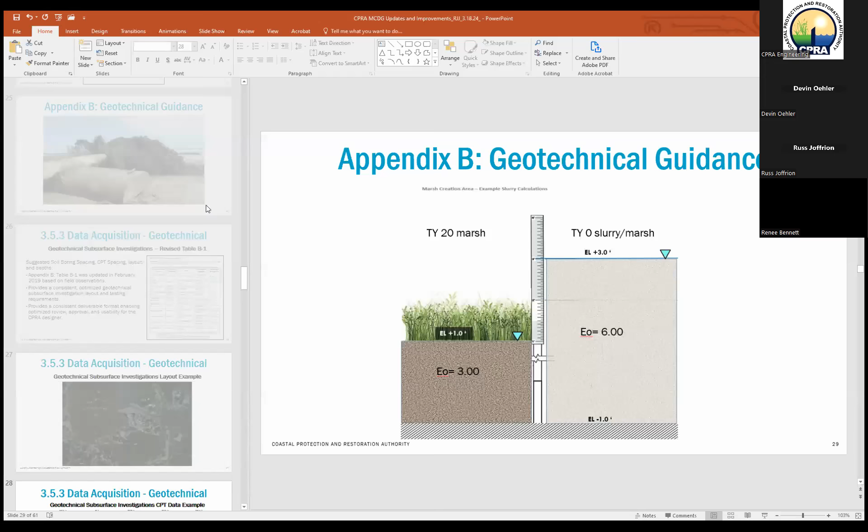All right, can you guys see that? It's in the presenter view screen. Is that good? I think it'll work. Then there is a way to show the presentation view too. Let's see, little icon down on the bottom right, if I'm not mistaken. I don't see anything. All it's got is stop sharing, hide, nothing. Presenter view, is that it?

Shoot, I'm seeing your content here. Okay, so I'll get started.

Introduce myself real quick, my name's Russ Joffrion. I'm one of the managers at CPRA Engineering Division. Some of you guys know me, some don't. Been around for a while. Actually have over 30 years with state civil service. I did about 10 years doing bridge construction and foundation design, and then came here in the early 2000s and have been having lots of fun learning marsh creation.

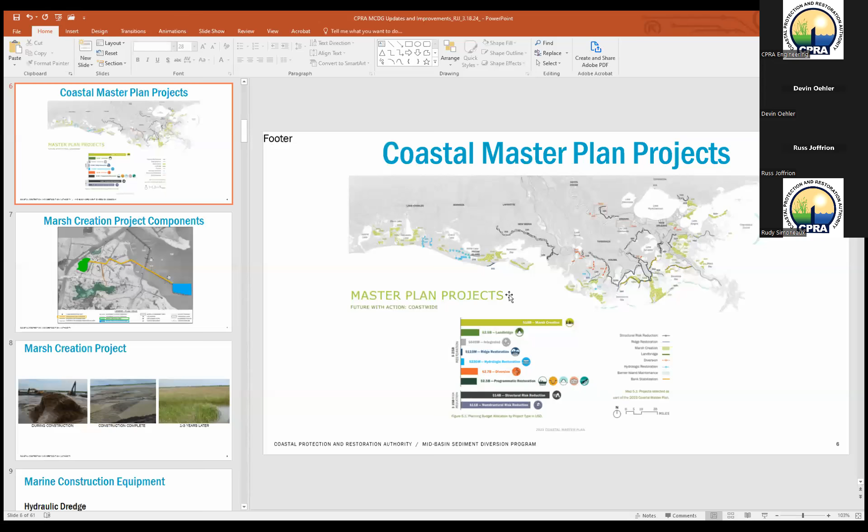Hold on, y'all bear with me for one second. Jack, can you see this? I'm seeing just my own view since you've stopped sharing. Hold on, one second, let's try this one more time. I was having computer issues yesterday. Okay, what do you see, Jacques, right there? I see your presenter view, okay, which I guess will work, but it would be nice to get it in full presentation view. Okay, so I'm gonna hit slideshow, do you see that? Yeah, like somebody else was saying too, F5 is the keyboard command for that. I see the same thing right now though. Do you see the slideshow? I see what I'll call the presenter view, not the full slideshow.

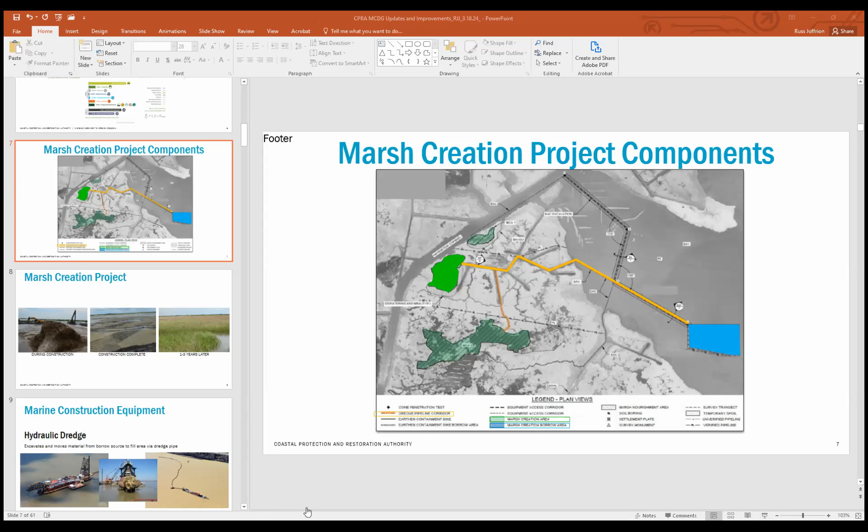I don't know what it's doing. Switching - that's your computer screen, not the PowerPoint. Go back to the Zoom. Same place you were on the share. Or do a new share and just do entire screen.

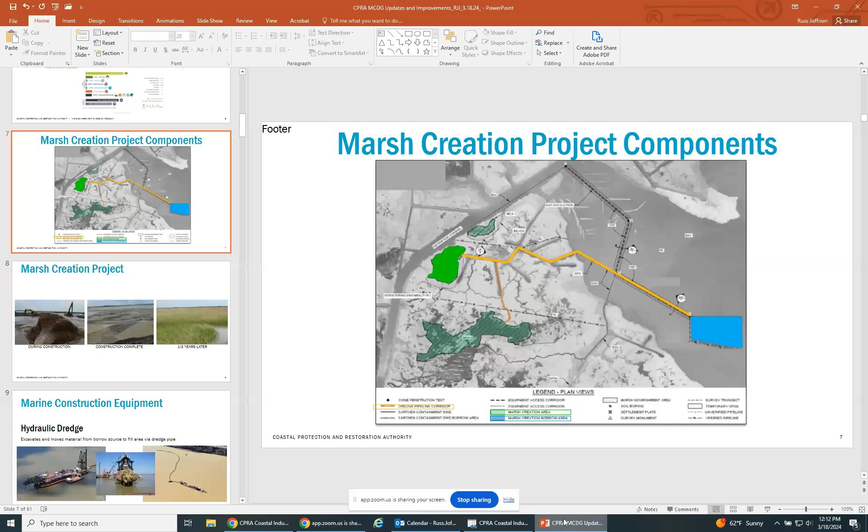Okay, hold on, all right, share that. Now go to PowerPoint and start the show. Okay, now can you see that? Yes, that's good, Russ, we got it. Good, okay, if I move it, do y'all see that? Good to go, thanks. All right, thanks, appreciate it. I had technical people helping me out.

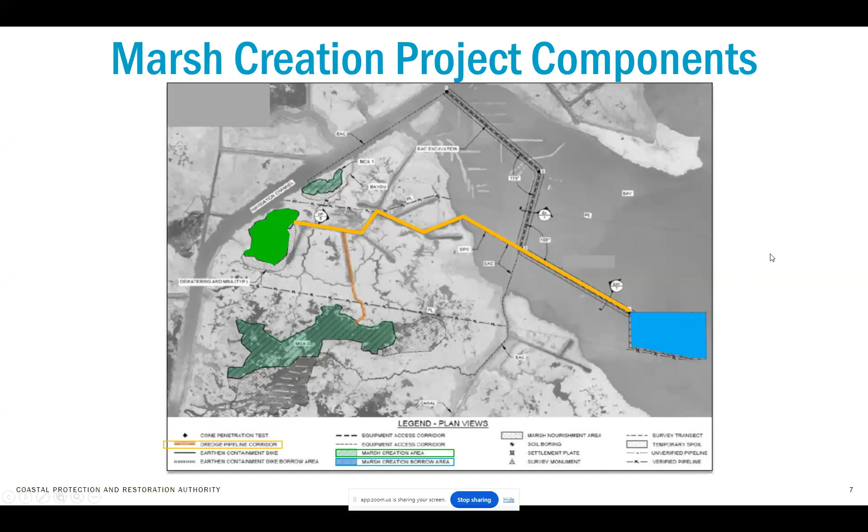Thank you, Travis. So the marsh creation components - I talked about that previously, that you've got your three major components. Nothing flashy here. So the marsh creation project, this is just a few slides showing generally how this stuff goes down. It's primarily constructed via hydraulic dredging sediment, pretty long distance.

That material is spread out within a marsh creation area. And then years later, typically 1 to 3 years, we get a platform that has jump started to help the marsh platform and the ecological side of that system start to take root and take over. So that's typically what it looks like.

I wanted to run through some of the equipment, because all these things are related to help implement these types of projects, and they're all marine-based equipment. So this is a view of a hydraulic dredge. This is Mississippi River dredging sand. It's a 30-inch dredge, capable of dredging pretty deep - 70, 80, 90 feet.

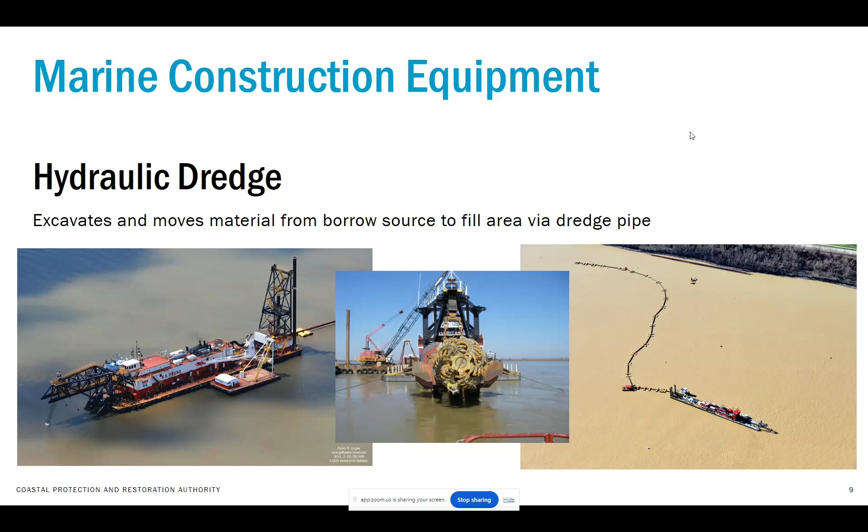Dredge pipeline could be made of different components. Some of the parts are floating rubber hoses. Primarily steel is what's used on the Mississippi River projects due to the sand. These will come in segments that are pre-welded and then flanged together. So logistically, these larger projects are pretty challenging, especially on the river, because you have navigational safety requirements that you also need to abide by.

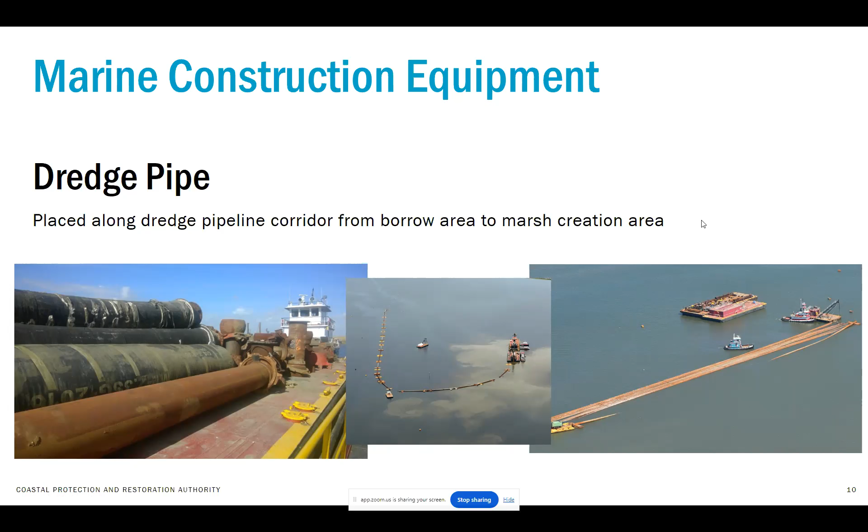But the components are the same, whether it's a river project or an inland project. You have the hydraulic dredge, you've got the dredge pipe, and then you have to build the containment to hold this sediment. This is typically accomplished by a tracked marsh buggy or a shallow draft barge mounted clamshell of some sort. What's interesting is over time, the contractors have helped develop some equipment that's more readily available to go into some of these shallow water areas, typically where containment needs to be built without a tremendous amount of drafting requirements. So that actually is a plus.

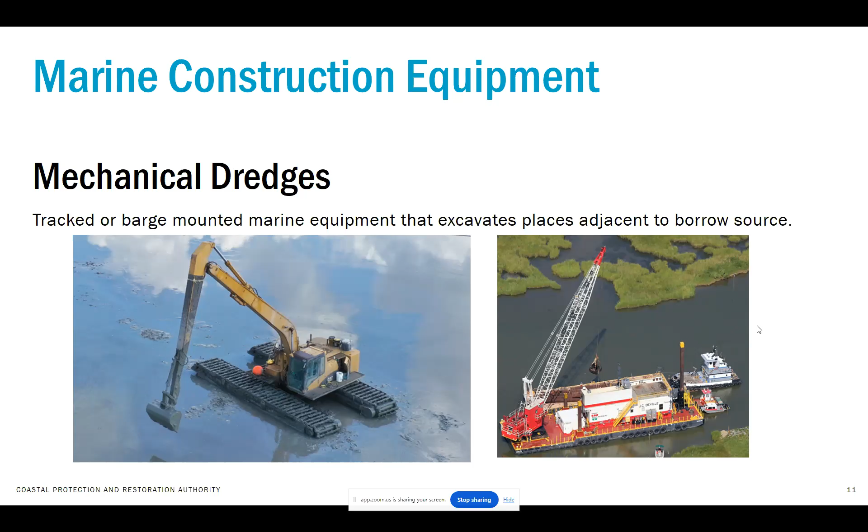You end up with a better containment dike design template if you can take bigger chunks at a time. So I'm going to keep moving.

Design guidance improvements - I thought it was important to show this slide because it gives you just a snapshot of the general components of what's going on. I think Syed will be talking in the future here on subsidence, and what's going into that, the effort that CPRA has done to try to develop those parameters. And what we tend to focus on the engineering side is the volume and the elevation and the hydrology, because these things affect the initial impact of the performance of that marsh platform.

So just to get everybody pointed in the right direction, what we're trying to do on the technical side is to jumpstart that system, so then the plant processes and the different hydrology systems and the sedimentation process can take over. So I'll move forward.

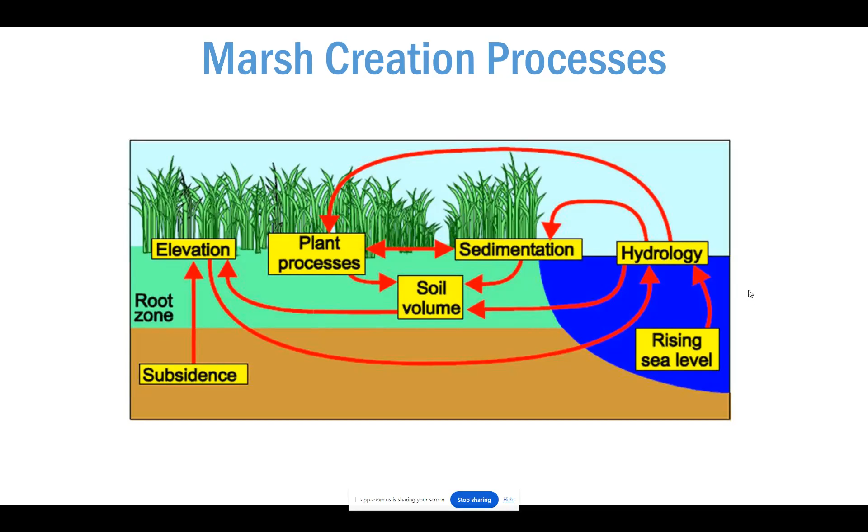So for the sake of time today, I'm going to focus on three areas: the survey and geotechnical data acquisition, your marsh creation area design, and construction. These three things, I would say, impact the performance of this type of project more than the others. So we'll focus on these.

So what are some of the improvements? Putting this PowerPoint together, I had to think back through our perspective of what we were trying to do. And I would consider what we've done so far a pretty good success as a jumpstart of a guidance document. If it's not broke, don't fix it. But there are always some things you can improve on, and that should be in the back of everyone's mind.

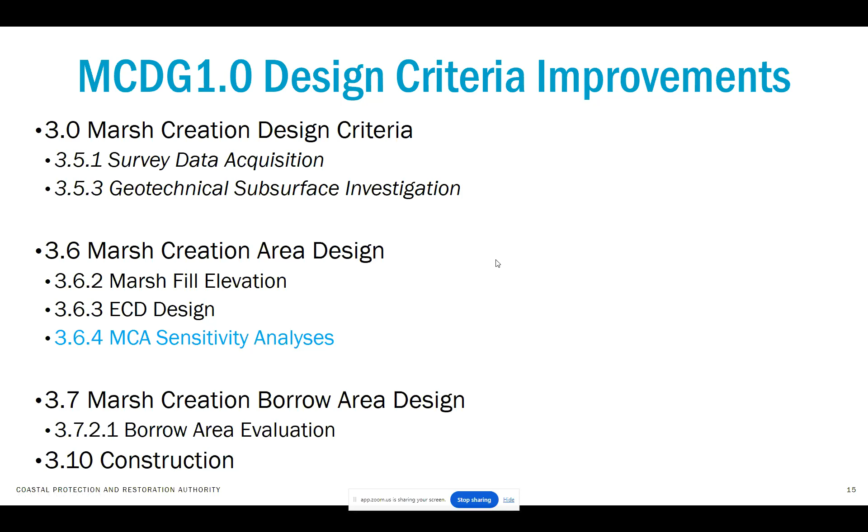So I'll focus on these components only. And the one in blue, where we're talking about MCA - Marsh Creation Area Sensitivity Analysis - something new that we're probably going to add. So we'll get into data acquisition. We'll go through Marsh Creation Area Design, and then a little bit on borrow area evaluation and construction.

The big highlight we've learned is trying to identify existing oil and gas infrastructure within the landscape. One of my colleagues presented on this last year, and the year before, and the challenges associated with that cannot be reiterated enough. We find ourselves building these projects in more challenging areas, and within our working coast there's existing pipelines, flow lines, active and abandoned wellheads. All these things we need to work around. So how do we do that?

These are the main cast of characters responsible for these things: the pipeline owner, the contractor, CPRA, the engineer of record, and the PLS. Each of these people and organizations has skin in the game when it comes to identifying existing infrastructure.

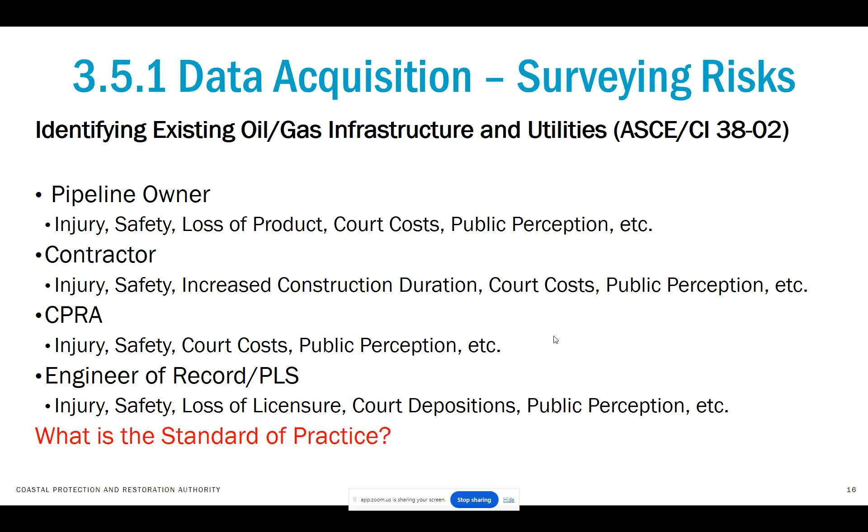So what is the standard of practice? Way back when we were putting these guidelines together, subsurface utility engineering was just coming out. It's a whole different subset of technical engineering that needs to happen on projects. It's gotten so bad on public works projects that this is now included as part of the engineering and design, especially DOT projects. So ASCE got together and said, here's some general guidance on how you delineate, interpret, and identify existing subsurface information.

We used this as a jump start to see if it would work on our projects, and it's been pretty successful. Since 2017 we've continued to use it during the design phase. It promotes safety during construction operations, and more importantly, it provides a consistent standard of practice for the PLS trying to identify and locate this information within our landscape. It also provides a consistent deliverable format for anyone involved with trying to interpret this information, and I'm going to lead to that here in a second.

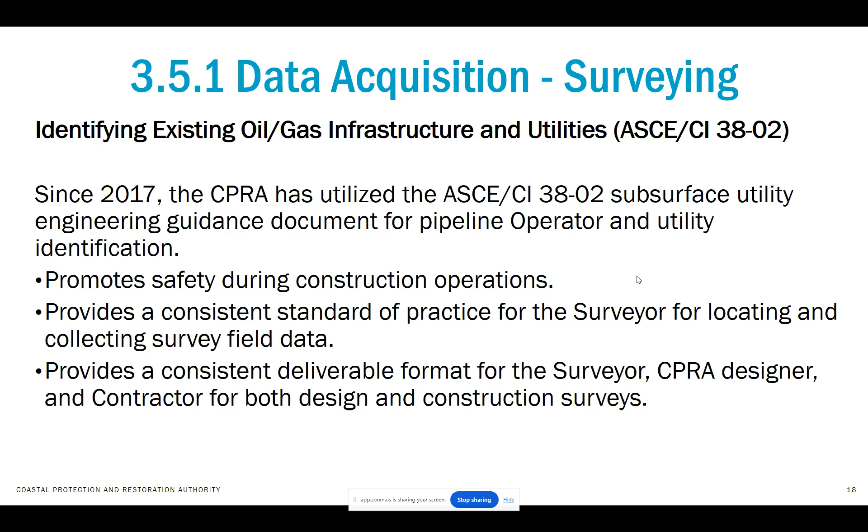So just a snapshot, we typically do bathymetric, topographic, and magnetometer surveys. This is strictly pertaining to magnetometer survey data.

So if I'm the engineer of record on the project, what do I need to know? I need to know the location of that operator, at minimum in X and Y, and where I think the contractor is going to cross. I need to know depth of cover, or Z. I need to know who the operator is, whether the pipeline is active or abandoned, or still in place and just not operating. What's in it?

Sometimes they will sell pipelines and put different products in them. And how big is it? That last one is pretty important, because what we tend to learn over time is these smaller diameter pipelines are actually flow lines, and that's typically where we have issues. The larger pipelines are probably better maintained and easier to identify.

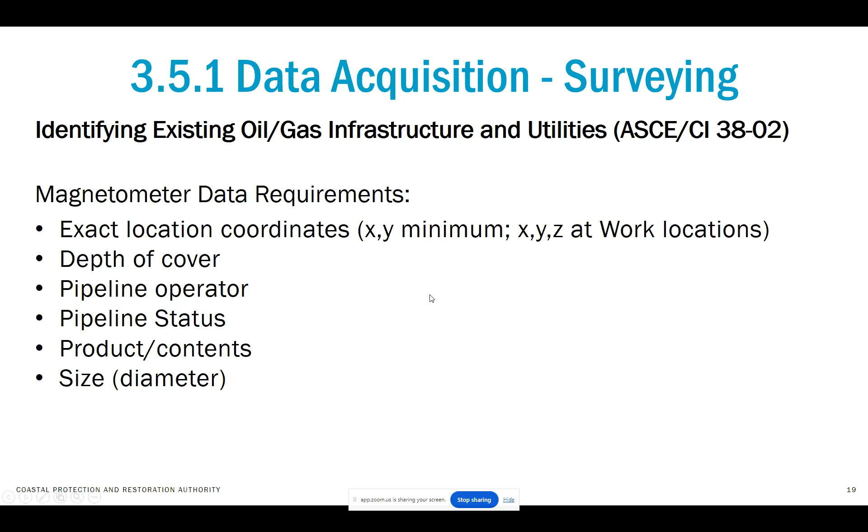So why is this even important? This is an example on a project we designed in-house where we had two pipelines: one between two existing marsh creation areas we were trying to create, and another abandoned flow line running right through our marsh creation area. So how do we tackle this in design? There were several rounds of surveys to try to identify what was there, locate them, and find potential issues.

Where it says top elevation minus 7.8, this colored portion of the pipeline is different because we learned during design that the top of the pipe was exposed in that area. You'd say you need to get in touch with the pipeline operator and tell them to cover it up — that would be great if it was in state water bottoms, but it wasn't. It's on private property, and there they don't really have to do it unless they think it's an extreme danger. So that was one issue we had to deal with.

The other issue was the abandoned line cutting right through where we had to construct a containment dike and place fill. We were extremely lucky on both pipelines that we could contact the operator, even for the abandoned line, and they were very helpful and cooperative during construction, coordinating so that no injuries happened on the project.

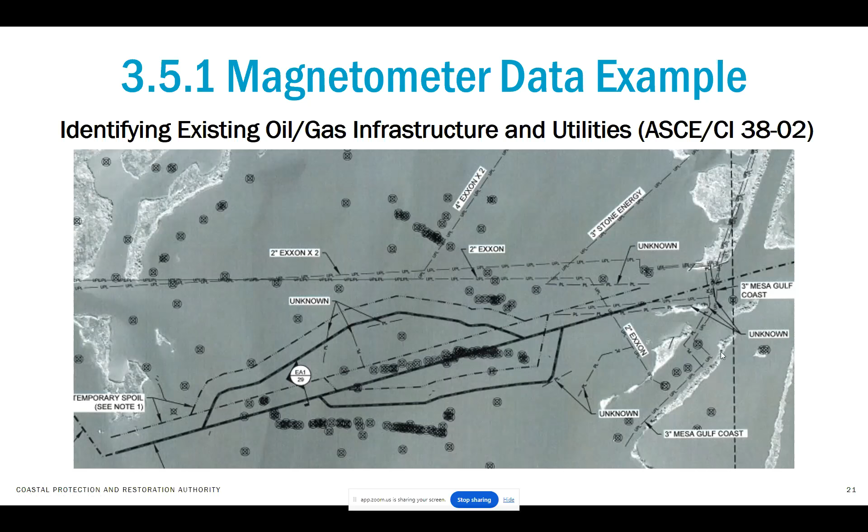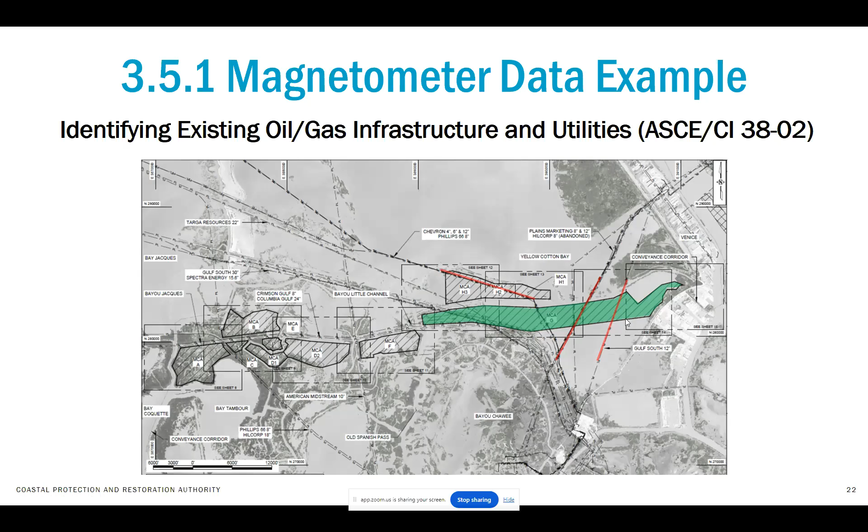Another example is the Spanish Pass project designed by Baird - same situation. These guys had it pretty rough too, trying to navigate design and construction with a lot of existing flow lines, some identified and some not identified pipelines. So the point is, this is a real deal. It's very real, and it's a tremendous effort to try to locate and identify existing infrastructure. The good news is we do have a process to help with that, and it has helped.

Just hang with me on pipelines, I'm almost done. It's gotten to the point where we said, okay, we really need to pick up our game and explain to the contractor and subcontractors what level of effort has been done. This is where ASCE 38-02 comes in really helpful because it defines a quality level of work that's been done by the PLS and the engineer of record, delineated on the plan. This has really helped. I've discussed this with several engineers, not just here, to make sure we're doing due diligence on these projects.

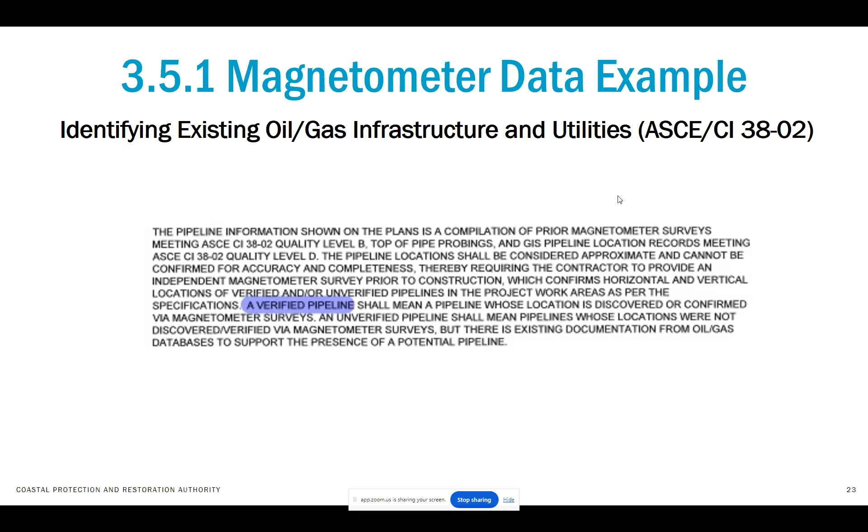Okay, we're going to move away from pipelines and get to geotech standards - hang with me, I'm about halfway done. If you're familiar with the Marsh creation guidelines and the geotechnical standards, one thing you may not have caught is that the geotechnical standards aren't just for marsh creation projects, they're for coastal restoration projects as well. Some of the same requirements you need for marsh also apply to barrier island projects and shoreline protection projects. So it's a one-stop shop for all your geotechnical needs. Let's get into that.

Why do we even need geotechnical guidance? Just look at this picture. You dredge your material 4, 5, 6 miles away - it's in a state that was probably put there by the deltaic process. Now you're going to disrupt it, put it in a pipe, basically emulsify it and turn it into 80% water, then let it come out of a pipeline into a marsh creation area that looks like Borden chocolate milk. And by the way, I want you to figure out how much that's going to consolidate. So let's get into it.

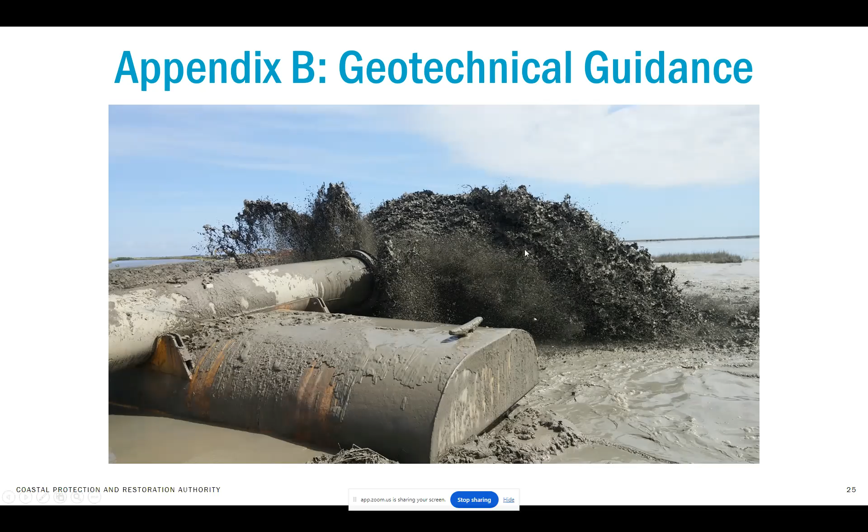We did make some headway on the subsurface requirements - how many borings, how many CPTs do I need, how do I lay these out, where do they need to be taken? In 2017, we had the previous version of this table. It was updated in 2019 based on feedback and field observations, scaling things back a bit to be more realistic about what you really need. That's where this revision came from. We optimized the locations and depths to not go crazy - basically, let's do just what we need to do to give enough information so the engineer is confident in what he's trying to accomplish.

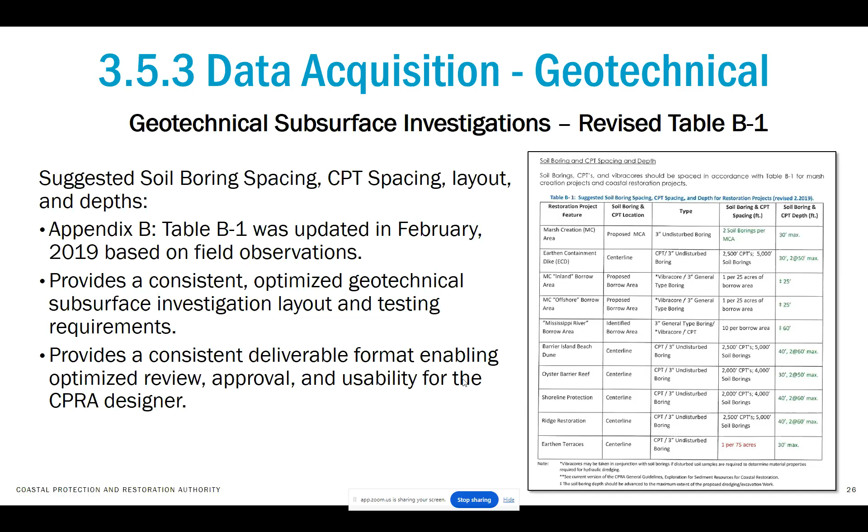So that's actually worked out pretty well. We've had consistent deliverables, and pretty good feedback on that.

Here's an example, I think this is BS 38, where we have borings we're taking in Grand Lake, and borings on the marsh creation areas. The green outlines are the previous proposed containment dike alignments. This was laid out and discussed with the engineer of record and the geotechnical engineer to determine what we can do, where we're going to take these, and what makes sense. It's a combination of borings and cone penetrometer tests.

CPTs are usually taken along the dike, and borings every now and then. Definitely borings within the borrow area, and I'll get to that.

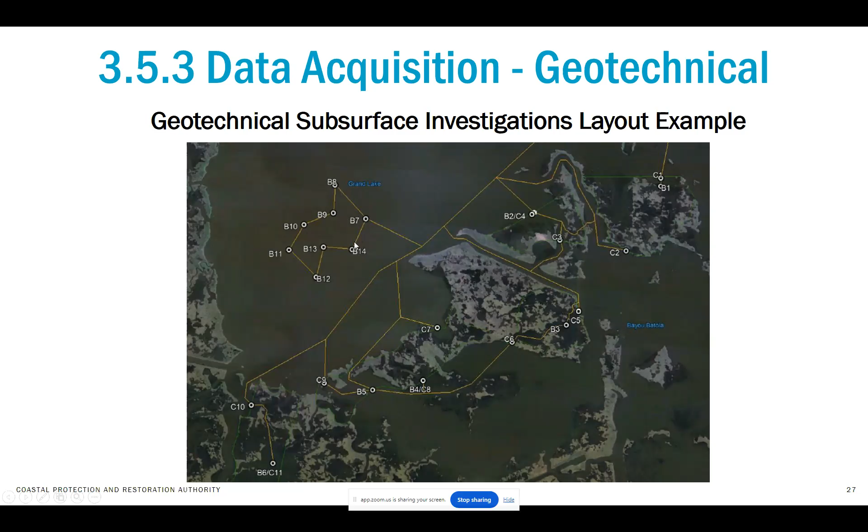If I'm gathering this data on a geotechnical investigation, this is just an example of what that soil profile might look like. On each end are two borings that we're taking, and in the middle are several CPTs. Both are really good. You got some guys that just want to use borings, and some guys that just like CPTs. With the type of work we're doing, I think the combination that we have works really well.

The CPT advantage is it can give you more detailed analysis identifying these smaller layers of material, like intermediate mixed sand layers. Borings, you may or may not pick them up. And that can help you when you're estimating consolidation.

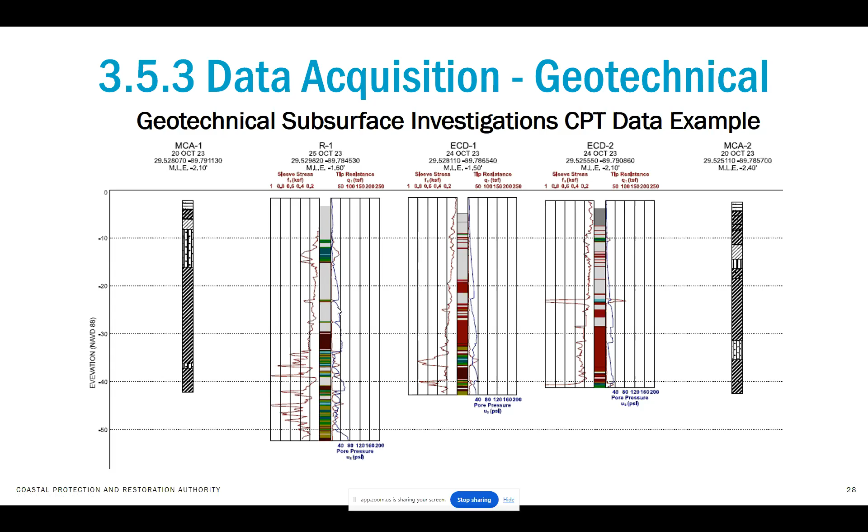So the whole gist of this, talking earlier about that soft material coming out of that pipe, is 80% water. This is kind of a schematic of what's really happening to the slurry. It's being dredged from a borrow area with a void ratio of about 2.5, then placed on the right side, a construction scenario, in a very liquid state. Over time, 20 years typically, the water is squeezed out due to its own weight, and consolidation brings it to what we get on the left side.

So basically in construction, my void ratio is doubling, is what's happening. This material is bulking 2 to 3 times its natural state. Then we engineers have to estimate what it's going to look like at that 20-year mark, and there's a way to do that.

Using software called PSDDF, it looks at the long-term self-weight consolidation, and we have testing requirements on how to do that within the guidelines. I'm not going to get into that because we'll be here for a while, but basically there's a way to estimate that TY20 platform elevation.

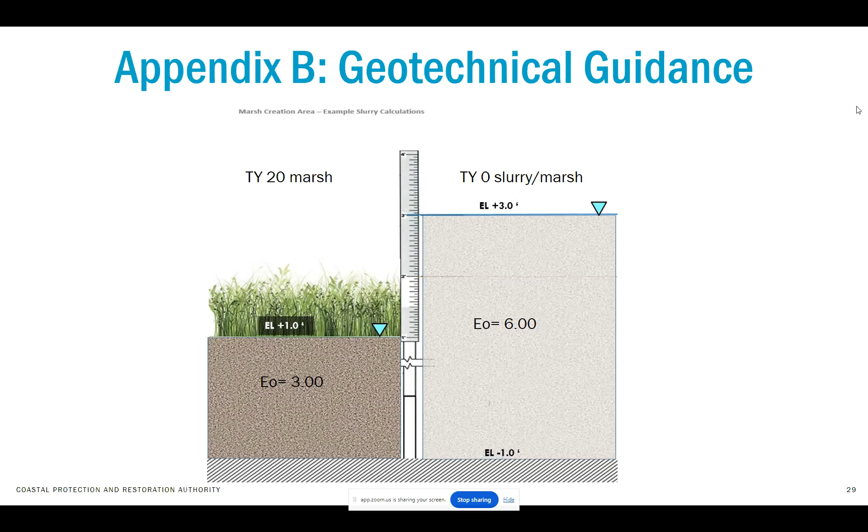Here's what we typically do. One of our geotechnical consultants, I think this was done by APS, estimated several different slurry heights to determine the long-term performance of that marsh platform, and that's these dotted lines.

The blue swath shows the zone where we're trying to estimate, over time, where this marsh platform could be performing at where it needs to be. In other words, there are different zone requirements for inundation, depending on what type of marsh you're in. So that'll either get, usually from here, it'll probably get smaller.

The gist is this: long term, I'm trying to estimate a long-term performance of the platform while incorporating sea level rise and my water hydrology requirements over time. I guess that's the best way to describe that.

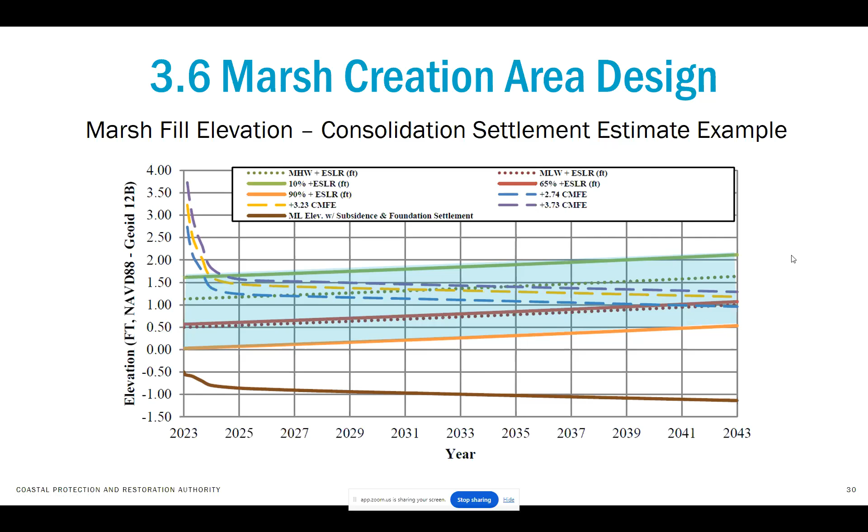You can see they have several different heights they ran: 3.23, 3.73, and 2.74. You get different curves. These curves are used for benefits for the project that then go back to the rankings of the project when they're picked.

One thing we have changed is estimating the actual volume needed for each creation area. We've changed this methodology, and what we've done is go back to the knowns. We used the TY20 marsh elevation to compute the actual volume that we need, and that typically ranges from 1 to 1.3.

What you need to do is use the void ratio of your borrow area compared to the void ratio you estimate for TY20, and that's where you get your cut to fill ratio. Honestly, it's anywhere from 0.8 to 1 typically what we see.

That's a big change we've made, and we've actually based that on measured data. That's helped optimize the work and volume needed to achieve the benefits of the project and reduce some costs. So that's been a really big jump.

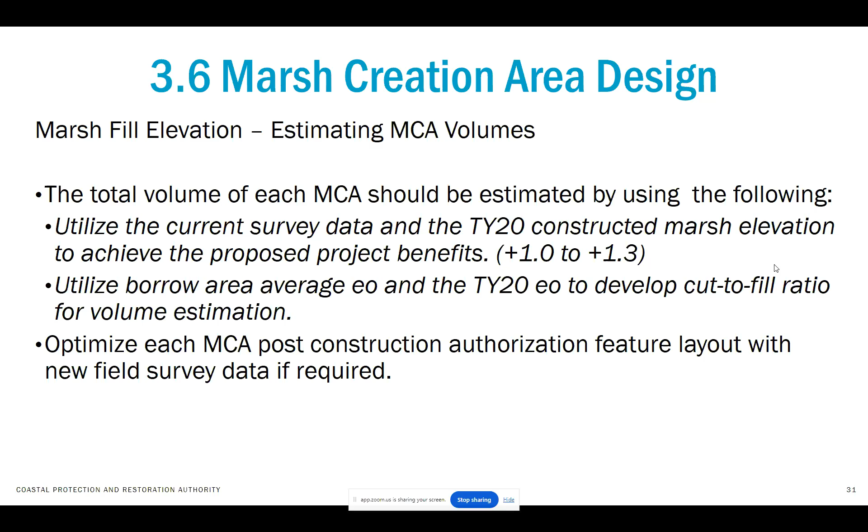Let's go to the next thing. I'm going to switch real quick to containment dikes. In order to hold this fill material, we have to build in situ containment dikes, typically done with a marsh hoe and side casted.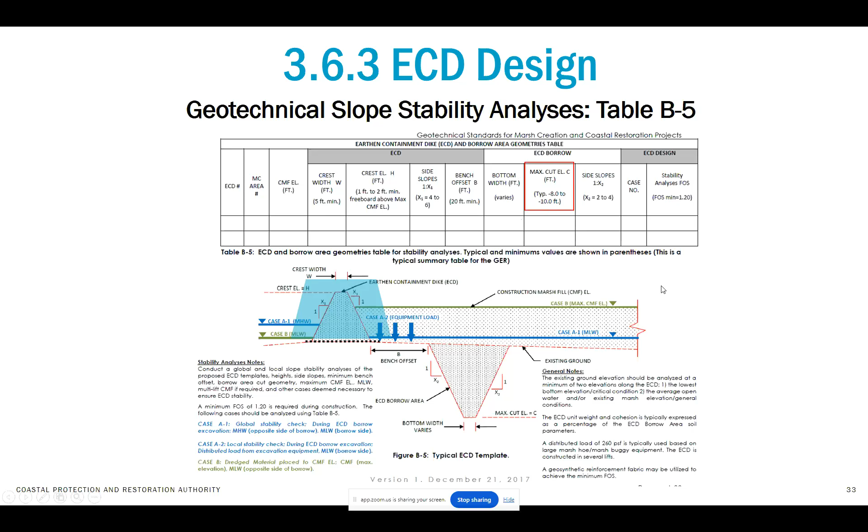So why is this important, and what are we trying to do? Well, it provides guidance for the constructability of the containment dike. It enables the engineer to anticipate ECD problems prior to construction - that's been one of our really key focuses the past 2 years. It could be part of a quality assurance program, and it helps provide consistency.

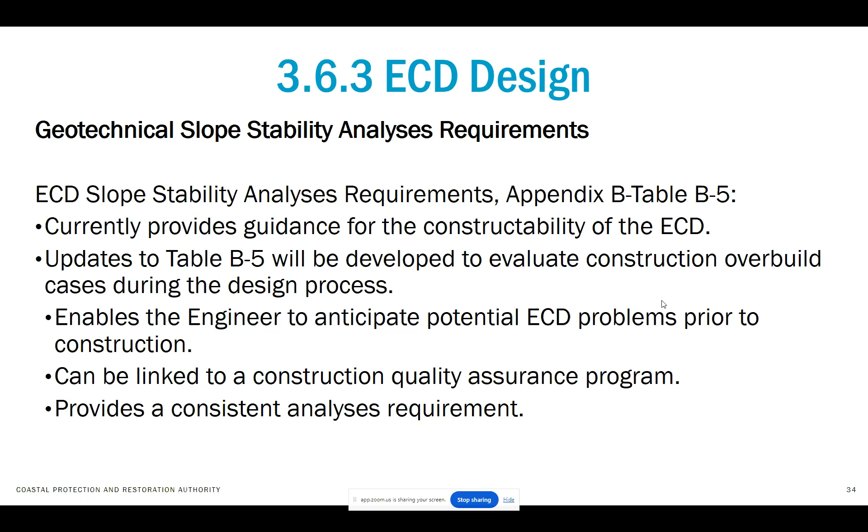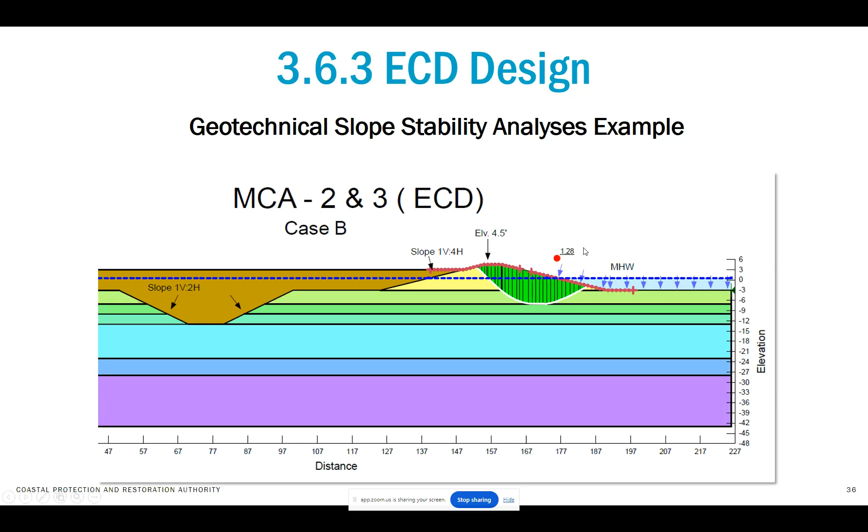The thing I've seen that's really a plus is our geotechnical engineering reports and data collection reports have really stepped up their game. It's some really good data, presented very well, it's an easy read. These deliverable formats have really helped move things along a lot easier, especially if you want to go back and look at some information.

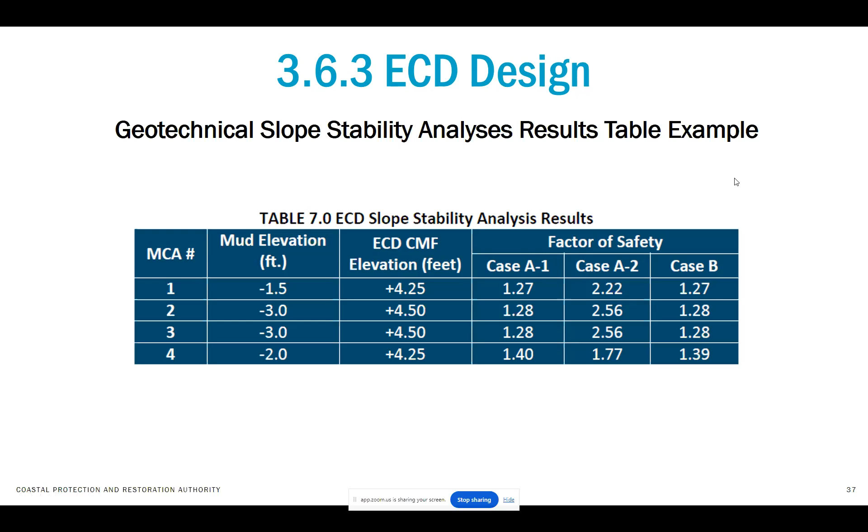Earlier I was talking about your marsh fill. Like, why can't we base our acceptance of the marsh on the elevation? I'm going to show you why you can't - well, I'm not saying you can't, but I'm going to tell you it's extremely difficult.

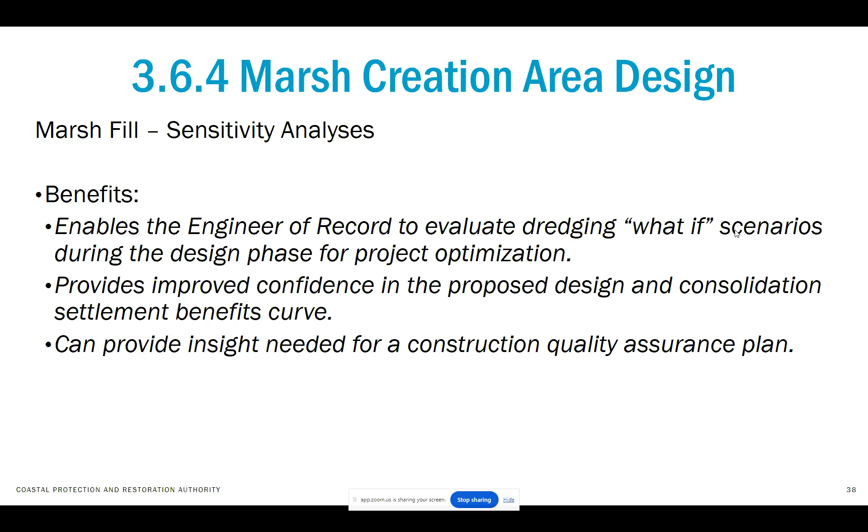If you do this type of sensitivity analysis, it's a what-if: what if the contractor does this, what's the outcome? This is a really good game we play internally, and I think some of these we're going to include in the next update on the marsh creation guidelines. It also provides insight on maybe what areas you need to focus on during construction.

Here's a what-if: what if I have a marsh creation area and my production rate varies? We're pretty good, guys, but we're not that good - we have to deal with varying dredging production rates, because so does the dredger. Honestly, the dredger really doesn't know what his production rate is going to be until he hooks up every hose, every pump, every bend, everything in his whole system. Who's operating the dredge, the conditions - they really have no idea.

So I'm going to get to that. That's just if you do a sensitivity analysis on dredging production rate. The gist is the faster he puts it in there, the higher my slurry. The slower he takes his time, the lower my slurry.

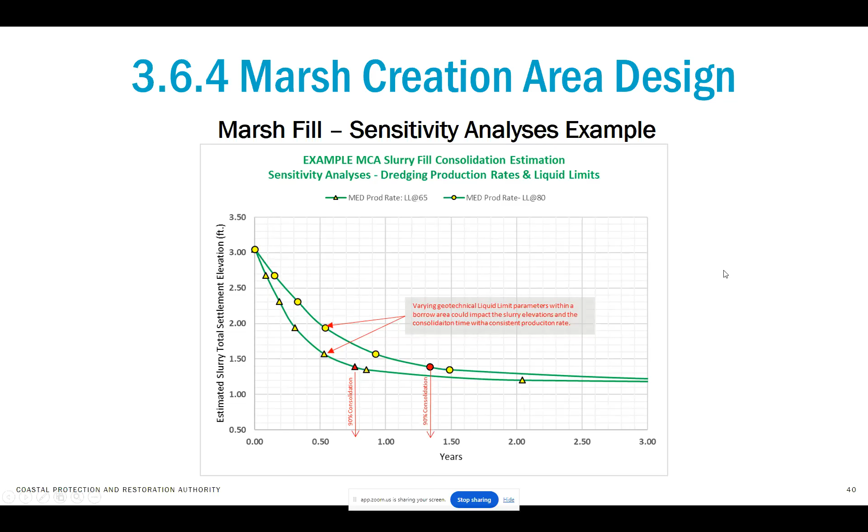So that's a couple of what-ifs that we're doing. Another thing that we've been working on - I'll give Adam Linson some credit on this because I stole it from his project, and I think Stephen Cook led the charge - is that the other thing that impacts dredging is the material that you're dredging.

We started this probably 2 or 3 years ago, maybe a little longer, where we take a much closer look at the type of material we're dredging and the moisture content of that material. The gist of it is liquidity index. If you're above 1, that means the material is behaving more like a liquid - it's easily dredgeable. The lower you get away from there, that means less moisture in the material and could potentially have dredgeability problems. So this is just an example of things we were looking at to try to anticipate some issues before we get to construction.

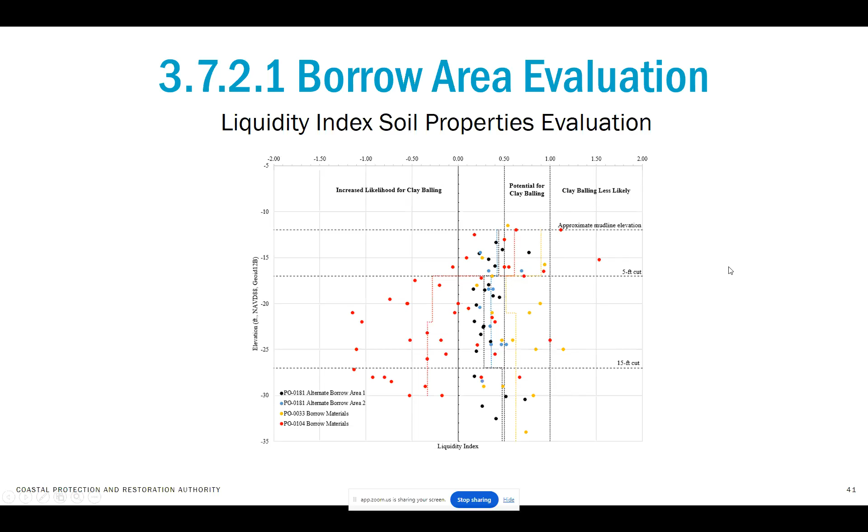Okay, speaking of construction, is everybody hanging with me? I hope y'all doing all right. I got about maybe 5 minutes left.

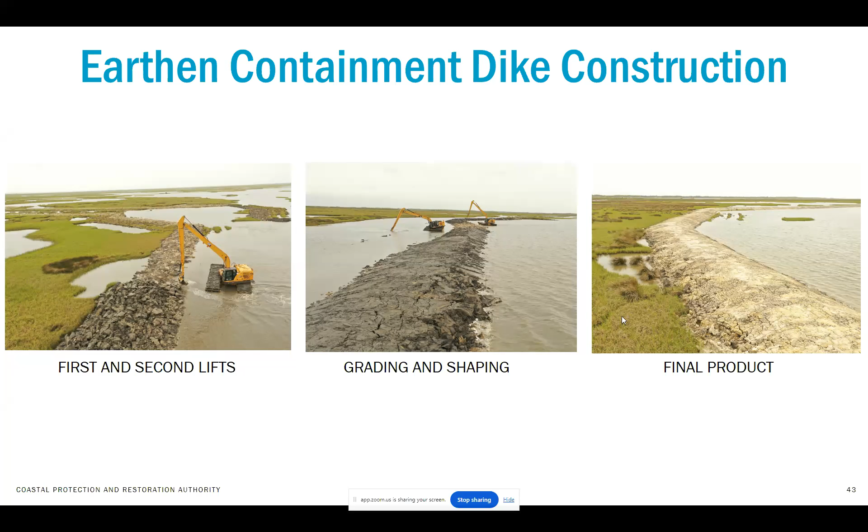Construction guidance is important, guys. If you're dealing with any type of geotechnical work, the construction component is always linked to the design component and vice versa. So we've been working pretty hard to make that connection. Containment dikes are never built in one lift - it's pretty much impossible with the conditions we work in. You probably have a minimum of 2 lifts with a shaping lift, and if you're lucky you end up with what you got on the right side, which is really nice.

Once again, marsh creation construction - just to kind of reiterate, here's the things we're trying to do. In construction, there are some things you can do. If you document your project well and have good construction oversight, you have records that can help inform future designs.

Here's an example on the Lake DeCade project. There's an excellent record of the dredging production rate over time, and this is extremely valuable when estimating the duration for the volume you need to dredge, because it pretty much controls everything. As I was showing you, if you're off on that production rate, you're going to impact that slurry height. So this is a good example showing he had a really good rate right at the beginning, probably moved the dredge, and then was very consistent from that point forward. It's just an example.

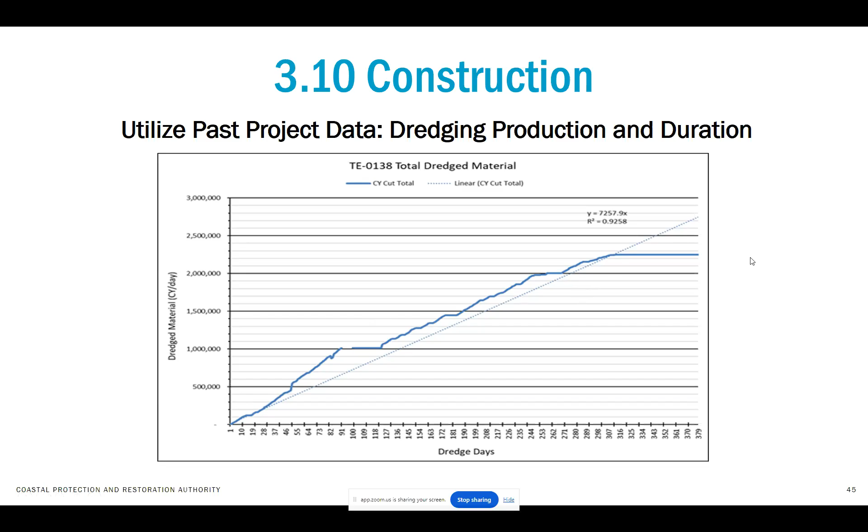The other thing we're doing in construction is trying to gather data during construction. This is more on the geotech side - normal geotech practice: piezometers, pressure cells. Any of these types of things is normal earthworks geotechnical practice, and we're applying this to the marsh side to get a better understanding of what's going on, to help monitor that information, and potentially use another instrument to measure slurry density.

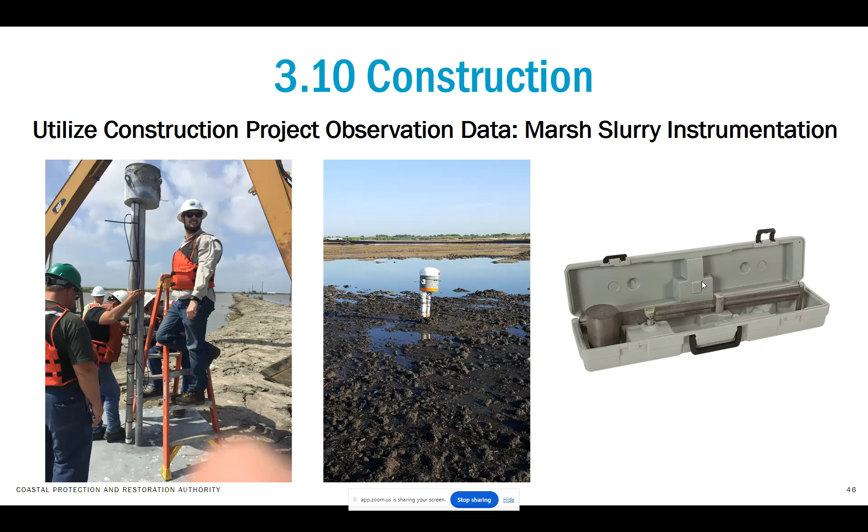So we borrowed that from the drilled shaft industry. Some of the things we've learned in the past, we're trying to use now to observe projects during construction to just get a better project. And then ultimately, this is where we want to try to end up: some kind of construction quality assurance plan. This is just an example of something that potentially could happen.

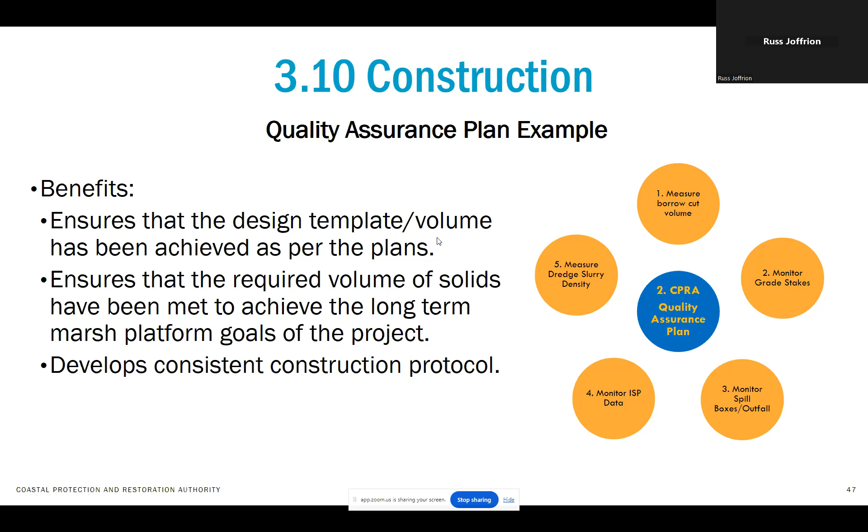So why does this benefit you? It ensures that you're getting the volume needed as per the plans and the design. And then you get more consistent construction protocol if the same process is followed regardless of the contractor.

Summary and challenges - maybe 3 more minutes if y'all just hang with me. So, the marsh creation design criteria, your survey and data acquisition, and your subsurface investigation - I think we're doing okay there.

We can look under the hood again to see if we can optimize even more, but I think we're pretty close. Same thing with ECD design and your marsh fill elevation. The sensitivity analysis is something new that ties all this together. Your borrow area evaluation needs to include the few things I talked about. And it was always our intent that the construction component be built up even more than what we have now to tie all this together.

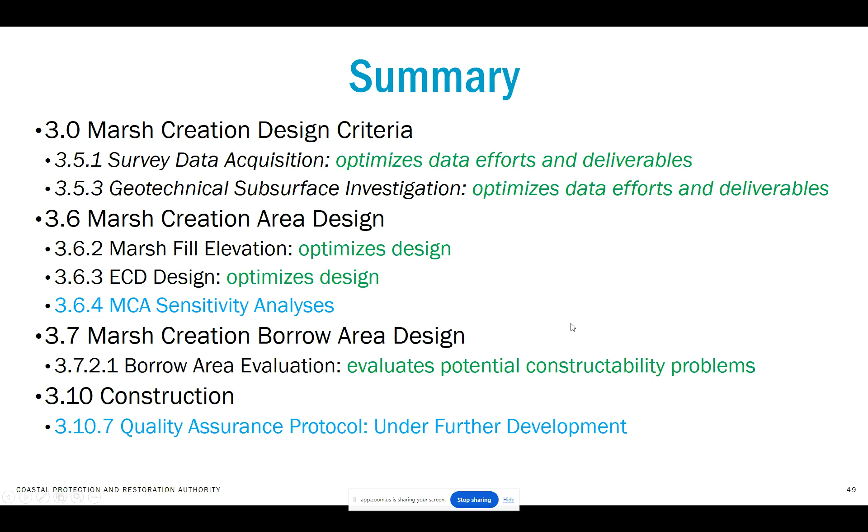Okay, some challenges. These are just a few. Unknown pipeline operators is getting to be really challenging. The known pipeline operators, the big guys, you can find that information, you know where they are. The flow lines are extremely difficult. And it is what it is. Somebody handed us this bag and we're left dealing with it, guys. And it is not easy. I'm not saying it's right, but it is what it is.

But regardless of what's there, it's our duty to try to move forward and to reduce the risks on the project and make sure that your project is safe.

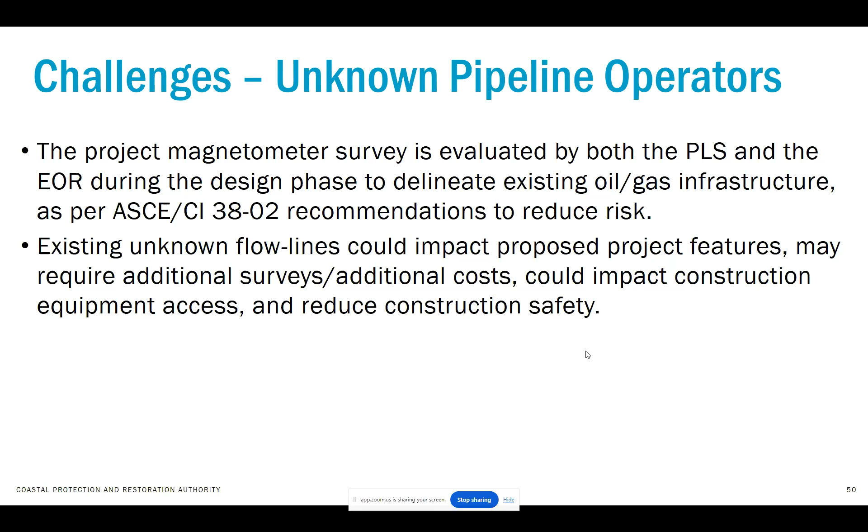The other one is changing landscape. This has happened on several projects. It's normally a pretty normal thing, but it seems here lately that it's just gotten a little bit more difficult with things changing pretty quickly. Even inland, there's quite a difference between our design survey and pre-construction survey, and that takes time to realign containment dikes. Your volumes change, so on the fly you're readjusted and optimized, and it's a challenge, but it's something that we do.

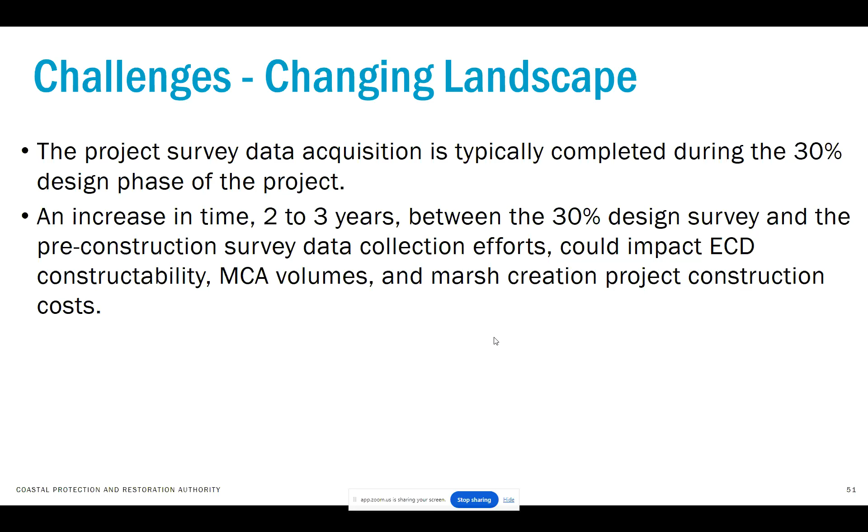The other one, I think Rudy talked about this, is construction costs have been increasing since 2022. There's all kinds of things linked to this increase - fuel prices, a lot of labor shortages. That's been a real deal from some of our contractors, and including equipment parts. Like one project somebody was working on, the pile driving hammer broke, and the only way to get the part is overseas, and it takes three to four months. Things like that seem to be a more common problem than it has been in the last 10 years. So it's something to think about.

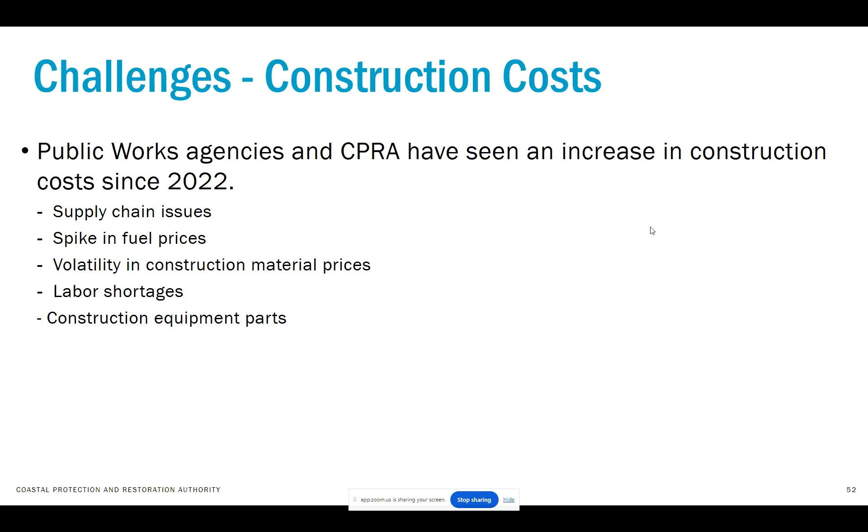So what are we doing to combat these challenges that we faced? It's kind of how engineers think, right? You got a problem, you identify the problem. So I think we're going to continue to use the subsurface utility engineering guidance document to delineate pipeline operators. I think it works well. And I have always done, but even more so, the value engineering efforts that are conducted post-construction - I think this is a great way to minimize constructability issues and optimize your features the best that you can based on the data that you have.

Your cost - the more we bid projects, the more reliable we are in trying to help estimate what those costs are. But it's just like any cost, it's an estimate.

Updating the guidelines - I think it's a real deal. We base it on applied experience, real data, to then provide some guidance for construction optimization with the intent to implement that on the project. And I think the last one, quality assurance protocol for these types of projects, should help provide some inspection consistency and hopefully reduce construction delays. That's the intent.

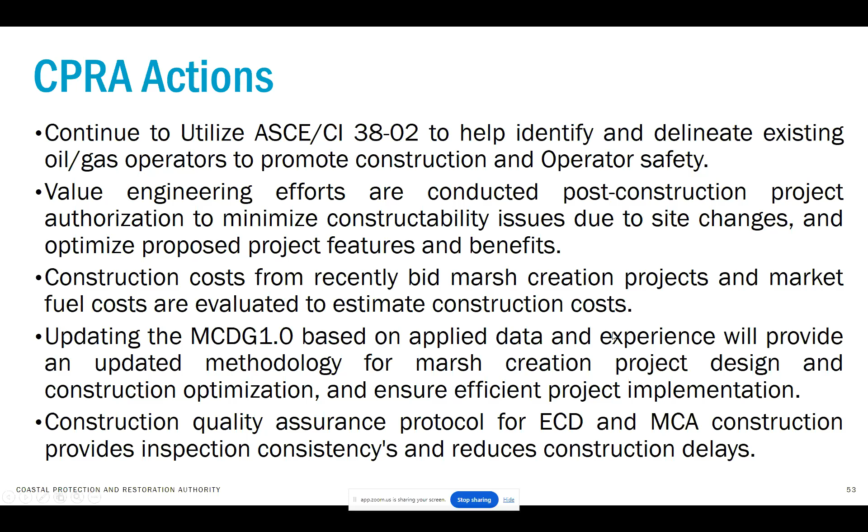And why utilize standards? It's pretty self-explanatory. Every project has risks. You want to reduce those risks for the owner, the contractor, and the engineer of record, because we're all in it no matter what. You need some type of minimum design standard consistent with sound engineering practices to construct these projects. You need consistent protocol - that's a big one. Right or wrong, if you're pointed in the right direction, you're consistent, and that gives you some leverage to then reevaluate where you are, and if you need to optimize that process, you can.

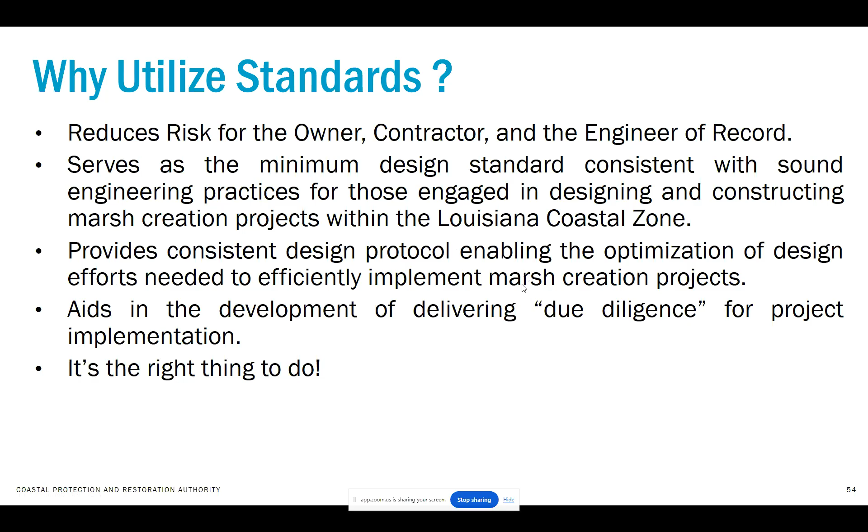I think we heard due diligence quite a bit here lately. There you go - so if you have standards of practice, then you're doing due diligence for any project. And then the last thing, it's always the right thing to do. I think I heard this recently: always do the right thing, even if nobody's looking. I strongly stand by that, especially if you're an engineer.

That's really all I had, Jock. After this slide is a reiteration, I think, of what you talked about earlier. Yeah, appreciate it, Russ. Good job.

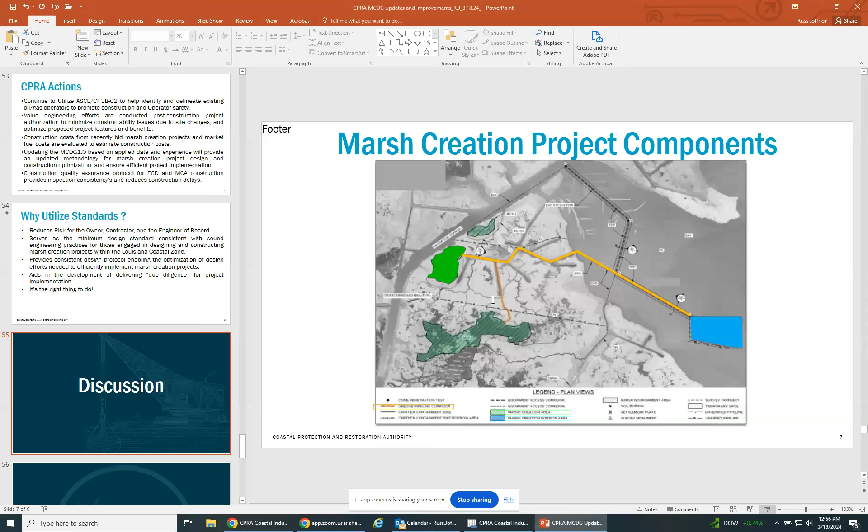We did have a question come through from Ranjit. I responded to him, but wanted to allow you to weigh in. His question, I'll repeat: Russ, any thoughts on how sea level rise will be accommodated in these guidelines going forward? Russ, heads up, I pointed him back to the section where you brought up the settlement curve. I really liked what you had to say there. I'll let you take it from here.

Thanks, Ranjit. Appreciate you chiming in and listening to my rhetoric. So the marsh creation area design on consolidation - for sea level rise, we actually rely on our planning division to give us guidance on the estimated sea level rise requirements. I think they just updated that recently. I don't know if we've incorporated them yet on a new project, but that's where we get our criteria from, as well as for subsidence.

So what we try to do is keep the water with the water and the land with the land. We'll include the sea level rise with all of our water level data evaluation, and then we will keep subsidence with our consolidation. We'll add that into our foundation settlement. So I don't know if that answered your question.

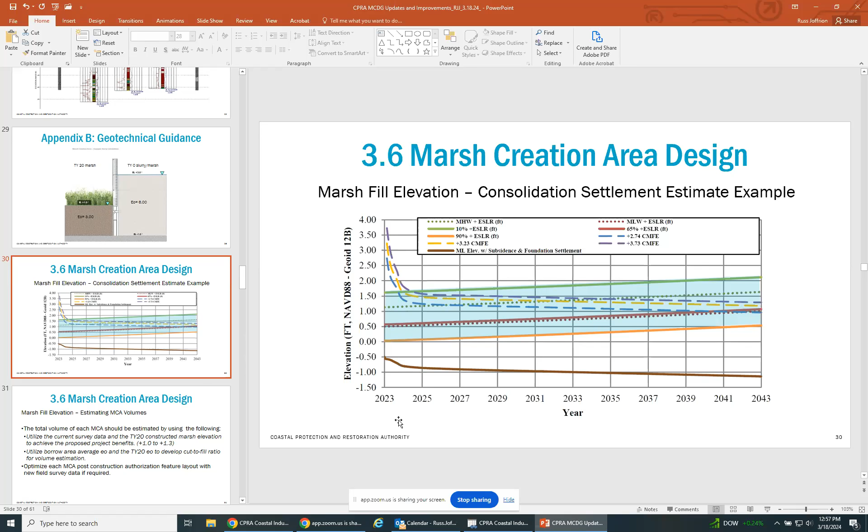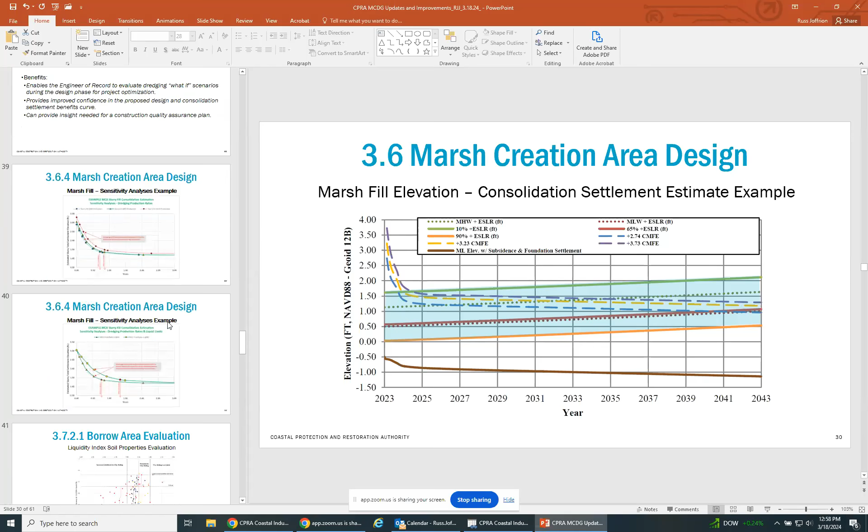Thanks, Russ. I'll just elaborate and say it's really our way of trying to account for relative sea level rise. Here's another question from Mike Juno, who works for Premier Geotech and Testing. Russ, do you plan to leave the containment levees in place after the marsh fill is consolidated, or do you plan to cut the containment levees to allow natural water flow to occur? It sounds like he's getting at our containment dike degradation gapping that we do, but I'll let you handle it, Russ.

Good question, appreciate it. It depends on the project. Primarily what we found, especially since you're exposed somewhat - pretty much all these places are now - but if you're exposed, we'd like to leave as much of the dike up as we can. It depends - if you're butted up against existing marsh, then we may degrade the whole thing. But if you're exposed or adjacent to an existing open water area, we might try to leave it up a little bit longer and gap it.

So regardless, at the end of the construction project, typically what happens is we meet with the federal sponsor and we will go out, and over time the actual low water areas - you'll be able to see where things are naturally low and where it wants to gap - and we'll anticipate that and work with the contractor and make that happen.

Good job, Russ. I want to mention that our regional offices out of Lafayette, for instance where I work, take care of post-construction - we call it O&M, operations and maintenance. It is not out of the realm of possibility that you see an O&M event occur where we're gapping containment dikes. So we definitely take that into account there, Mike.